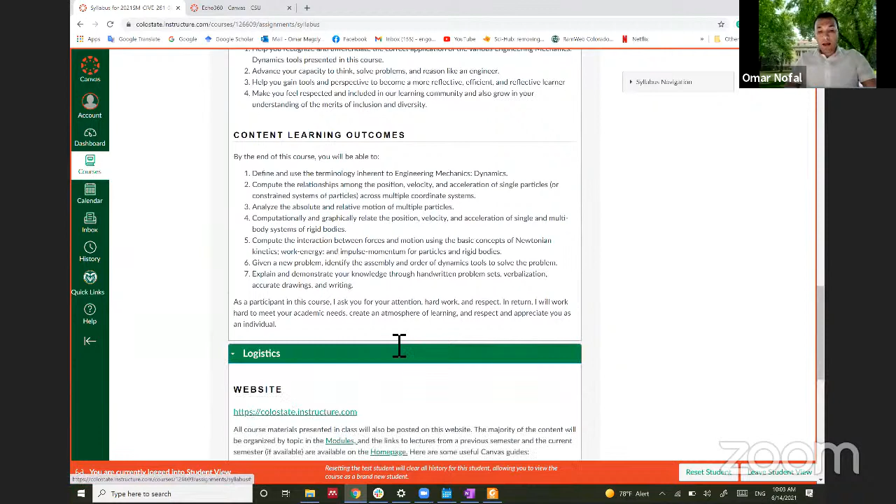Logistics, the textbook that we will be using, and my recommendation to use the Hibbeler textbook, 14th edition.

And here's how to upload your homework. Your homework will be uploaded onto Canvas. So you will go to your homework, you will find it if we go back, a panel that has homework, and then you go to homework 1 and upload your homework sheet.

It's better to use white paper, not lined or gridded. So you might use engineering paper, or white A4 or A5 paper, whatever you are comfortable with.

And it's better to scan your homework, so it's better to have it scanned. I do not recommend taking pictures with your phone unless they are clear and I can see them.

If I couldn't see them, I will return the homework to you, and you will only have one time to send it back if it's still not clear. So I might reject the whole homework submission. Just try to scan it, or have a clear version, so I can see the steps in your homework.

And here you'll find other information, try to check it to know the culture of the class, and for the assignments. So the total number of points of this class is divided into 10% on learning exercises.

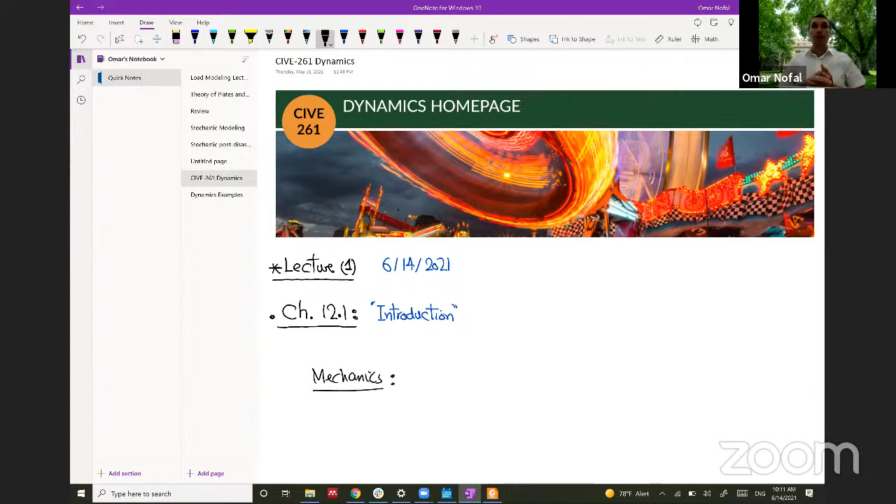Okay, sounds good, so let's get started here. Mechanics is a branch of physical science concerned with the states of rest and motion of bodies subjected to actions or forces. As you know from statics, the prerequisite class, mechanics is divided into statics and dynamics.

Statics is concerned with equilibrium of bodies. For example, if you have something suspended by two ropes with a weight, the body isn't supposed to move—it should be under equilibrium of forces F1, F2, F3. That's statics. In statics you talk about moment of inertia, mass inertia, and equilibrium of forces. You also sometimes solve trusses—say a truss on a support system that isn't supposed to move; it should be static. We solve for the forces on the truss so that all forces remain in equilibrium on this non-moving body.

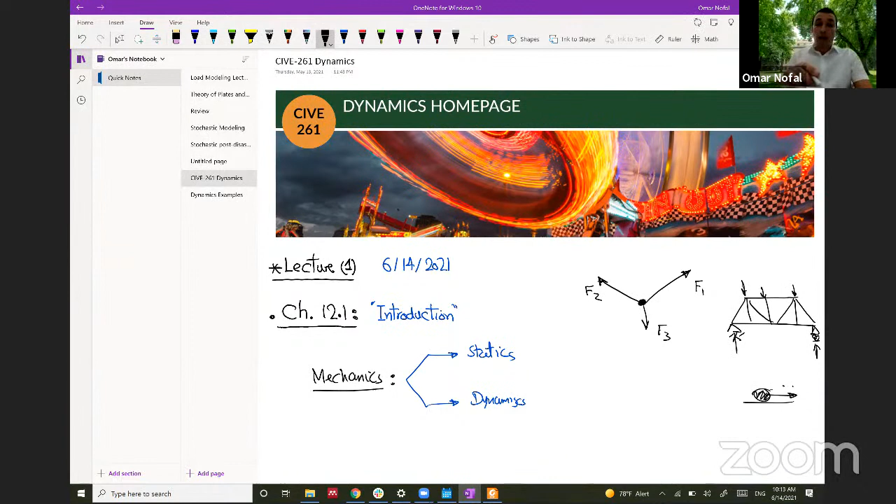But dynamics is concerned with the accelerated motion of bodies—like a car or a ball or something moving, having velocity and acceleration. So dynamics is concerned with moving bodies. That's statics and dynamics.

Let's get to dynamics, which is our class today. Dynamics is divided into two types of bodies: particles and rigid bodies. For each of these we study kinematics and kinetics. Kinematics is concerned with the position, velocity, and acceleration of the particle. Kinetics is concerned with the force or moment on the particle.

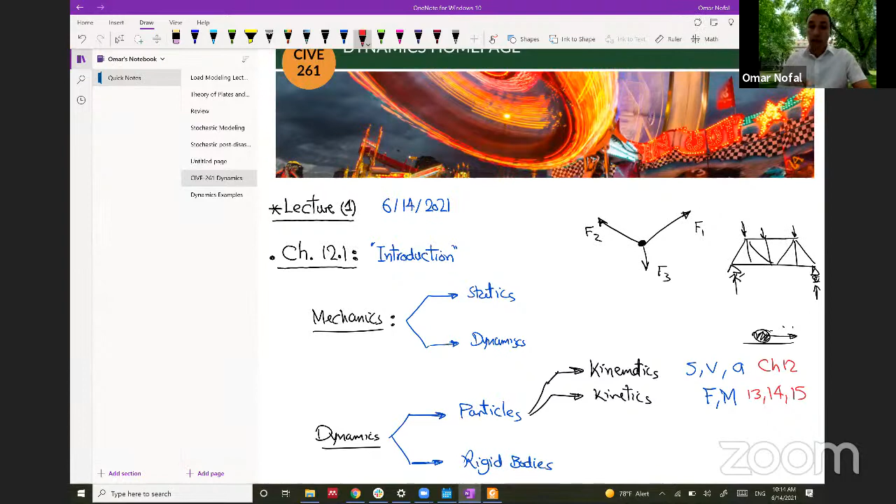The chapter covering kinematics of particles is chapter 12 in Hibbeler—this textbook covers kinematics of particles. Kinetics of particles is chapters 13, 14, up to 15. For rigid bodies it's the same thing—we'll be talking about kinematics and kinetics.

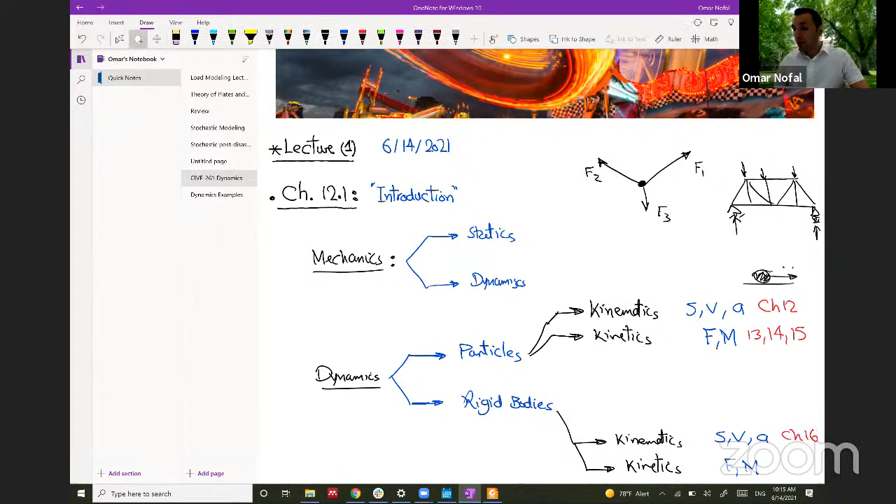For kinematics, we are also concerned with the position of the rigid body, the velocity of the rigid body, and the acceleration. Here we will be concerned about the forces and moments. The chapters covering this are chapter 16 for kinematics, and for forces and moments, chapters 17, 18, up to 19.

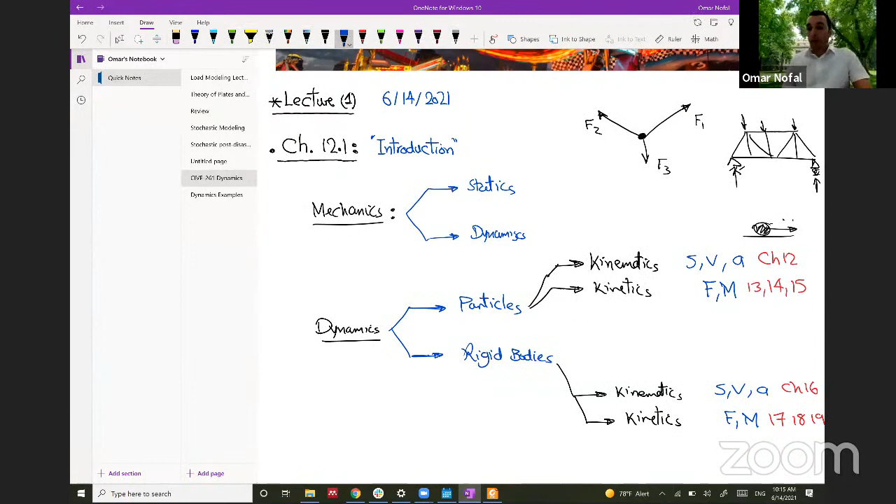The difference between particles and rigid bodies: for a particle, we neglect the shape of the body. Like if we have a car, we represent it with a point, a particle, and we put the forces like that - here's F1, F2, and F3. For rigid bodies, it's different - we have to take the shape into account, and the forces might be here, or there, creating a moment. This is the difference between rigid bodies and particles.

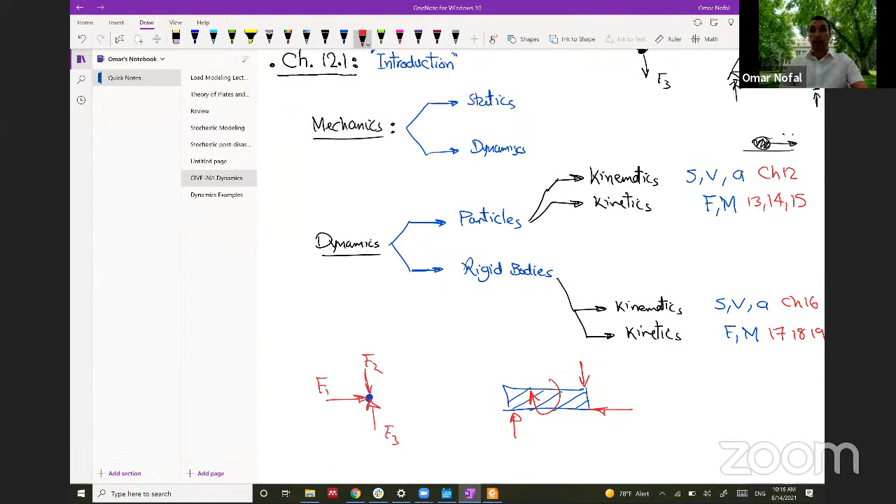Let's have some historical background. One of the first to do experiments using pendulums or falling bodies was Galileo Galilei, in the 1500s-1600s. Number two, the most important one, is Isaac Newton. Newton is the one who developed theories, and the culmination of his theories provided a relationship between motion and forces. He has, as you all know, three laws of motion: law number one, law number two, and law number three.

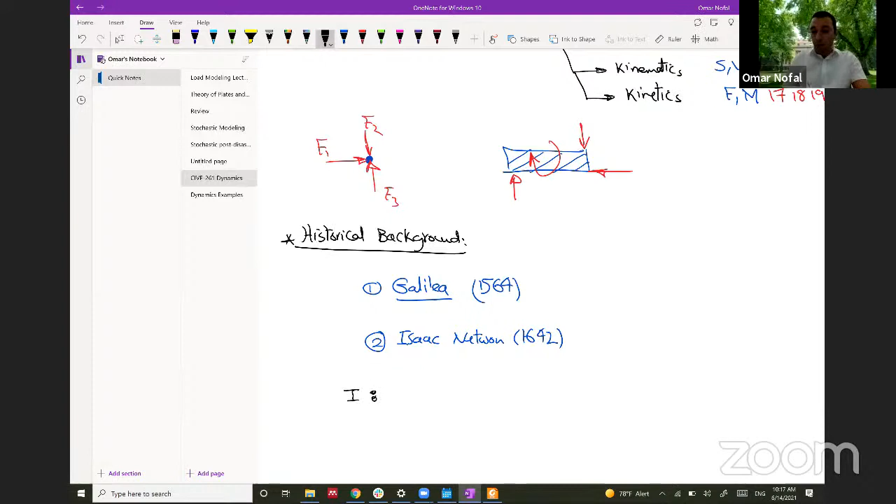Law number one says a particle remains at rest or continues in motion unless acted upon by an outside force. If I have this particle, it will remain at rest until you put some force on it. If you put force, it will make some motion. But if it's at rest, the summation of forces on this particle equals zero. Like if you have two forces like this, the summation of forces equals zero.

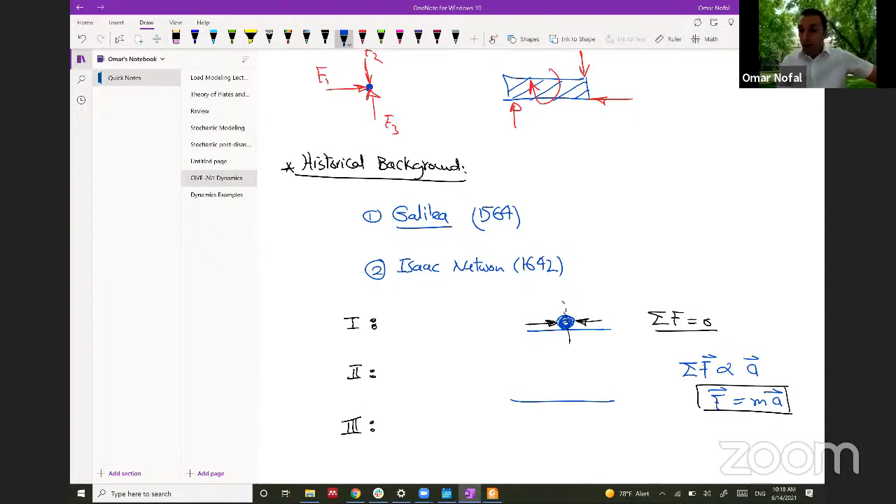For law number two, the acceleration of a particle is proportional to the resultant force. The summation of forces on the particle is proportional to the acceleration of this particle, and the proportionality factor is the mass - so sum of forces equals ma. If I have this particle in motion, it has some acceleration in this direction, so there are forces acting on it, and the sum of them is not zero - it equals ma. You have force here, friction, and whatever forces you have, the sum of all of these will equal the mass multiplied by the acceleration.

The third law of motion is the force of action and reaction between interactive bodies. Let's assume you have a wall with a hook, and a rope, and you put some force F on this rope, pulling it from the wall. The reaction here is R - if you take the sum of forces, F will equal R. This is valid for interactive bodies: the forces are equal in magnitude, opposite in direction - this is x direction, this is negative x direction - and they are collinear, on the same line.

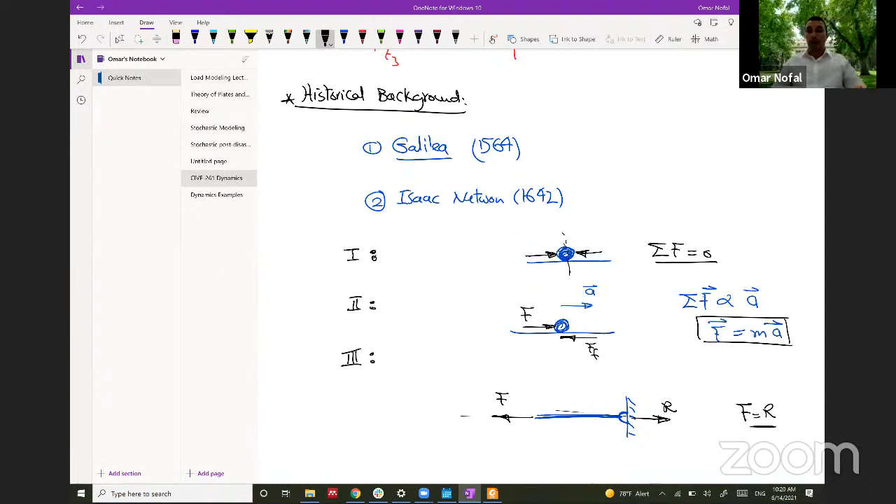So these are the three laws of motion that Newton came up with, and we will be applying most of these principles in our dynamics class. With this, let's move to chapter 12.2, which is talking about rectilinear motion.

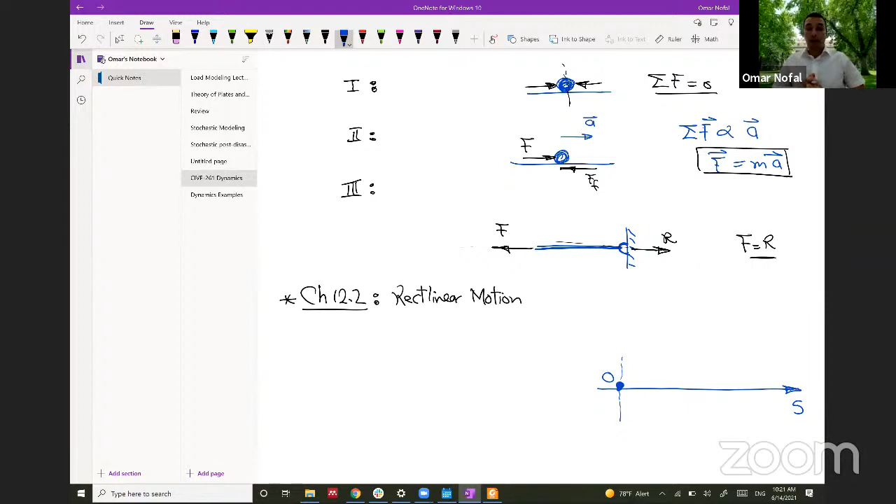For rectilinear motion, we mean bodies that are moving on a line. For example, if this is a road and this is the x-axis, we call it s, which is the position, and here's the origin, and my particle is at this location. If this particle is moving on this straight line and not on a curve or in 3D, we call this motion rectilinear motion, which is what we'll be talking about in chapter 12.2. Let's differentiate between some terms - number one, let's talk about position.

So for position, we mean the location of the particle at any instant with respect to a certain origin. So you define this as an origin, and the location, the position of this particle is at 0, so s equals 0. If the particle, and let's say this is time t equal 0, if the particle after 2 seconds is here, so this is what we call the position. The position is corresponding to a certain datum, which is 0 over here.

Let's second talk about displacement. Displacement is the change in the particle position. So if the particle started at t0 and ended at t equal 2 seconds, let's put units here. The final position minus the initial position will give you the displacement. So the displacement, we call it delta S, will be equal to S2 minus S1.

For example, if the particle at t equal, let's say this is T1 or T naught, and this is T1, and this is T2, and let's say this T2 is 3 seconds. So let's call this S1, and this will be S2. If you're talking about the initial position at T1 and the final position at T2, the delta S will be S2 minus S1. So it's the final minus the initial position.

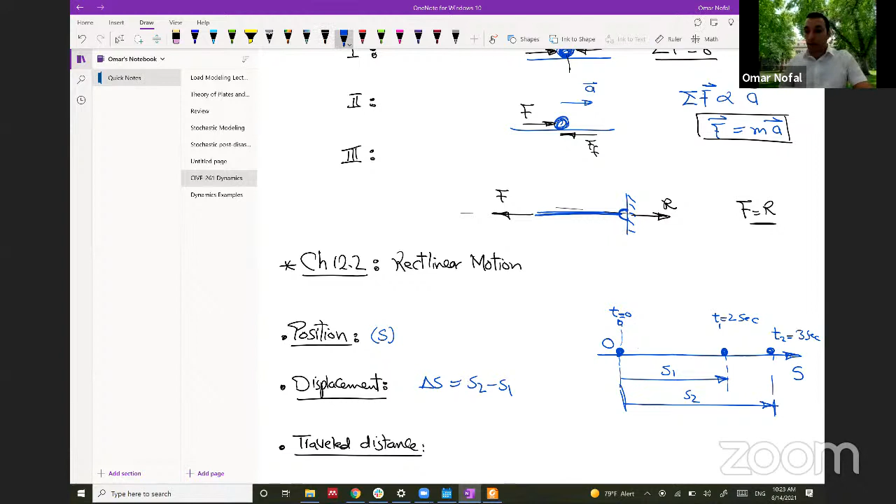Let's talk next about the traveled distance. For the travel distance, we are talking about the total distance traveled by the particle. For example, if this particle goes, let's make another one here. If the particle started at this location and goes in the negative side and moves back, so it goes here and then goes there, the final position of the particle is measured from here. This is the position of the particle. And displacement, if the particle moved from here to here, this is the total displacement, because this is the initial and this is the final position. But if we're talking about travel distance, you'll have to account for this distance, and this distance, and this distance. So this is the total travel distance, and we call it ST.

And let's talk about the scalar and the vector quantities. The position is a vector quantity, so we need to know the position and whether it's positive or negative with respect to the origin. If it's in this direction, this is S positive. If the particle is at this location here, it will be negative. Similarly, for displacement, we want to know the change in the particle position, and also whether this change is positive or negative. So it's still a vector quantity.

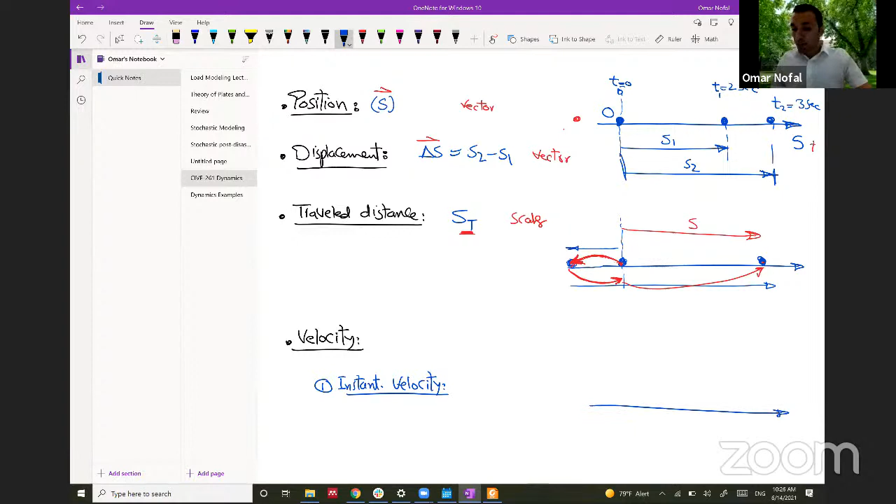For the velocity, we have different terms to define velocity. Let's start with the first term, which is instantaneous velocity. The instantaneous velocity is the rate of change of the particle position. So if I have the particle, let's write this again here, and the particle at T1 here, and here's T2, and this is S1, and this is S2. So the instant velocity is equal to, and it's a vector quantity, ds vector dt. This gives you the instantaneous velocity at each point over the motion.

So you can get it here, you can get it there. You'll have to differentiate the s vector, the position vector, and then you'll get the velocity as a function of time, and then you substitute with the time that you want. So here's at t equals 0, here's at t equal, let's make this 2 seconds, and this will be 3 seconds. If you want 2.5 seconds, you'll get it from here. So this is an instantaneous velocity, meaning the velocity at any instant, and it's a vector quantity.

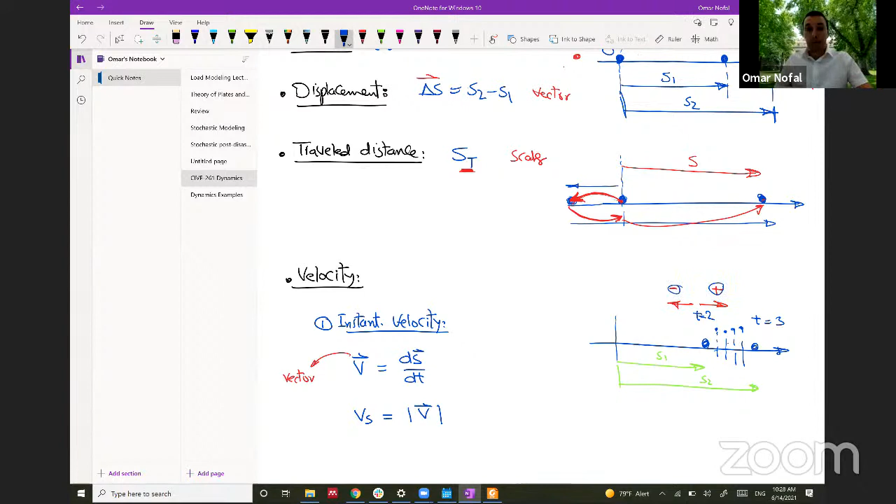So let's talk about the scalar quantity for the velocity, it's called Vs, it's the speed. It doesn't matter if the velocity is in this direction or that direction for the speed. The speed, I just want to know if your velocity is 50 miles per hour, 20 miles per hour, I don't care about the direction. But for the instantaneous velocity, we care about direction. We need to know if you're going in the positive or negative direction. So it's kind of similar, Vs is like the scalar quantity of the velocity after excluding the sign, positive or negative. So this is for the speed, and let's put it V, Vs is equal to the V vector here.

And number 3 is the average velocity.

So the velocity is changing, like for example here it starts at 2 meters per second, but when it gets here, it's 5 meters per second. So for the average, 5 plus 2 over 2 gives you 3.5 meters per second. This is the average velocity. In instantaneous, it gives you the velocity at each instant, so here it gives 2, here 2.5, 3, 3.5, and so on. This is for the average velocity.

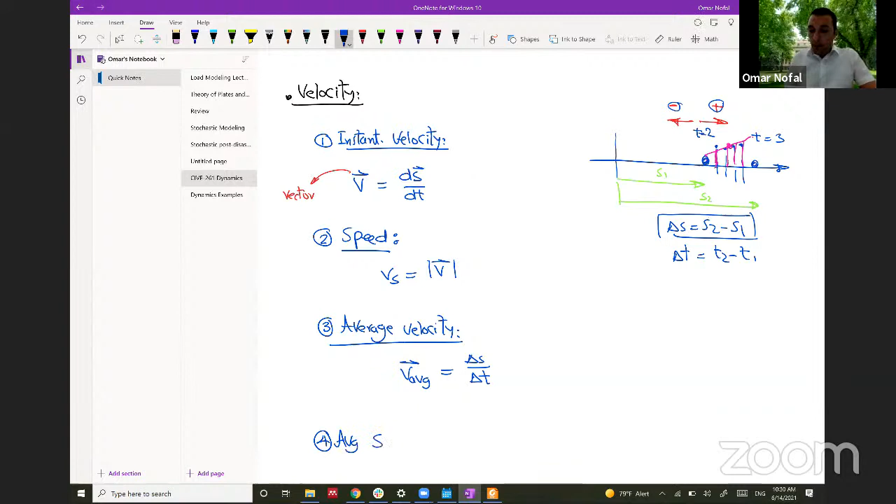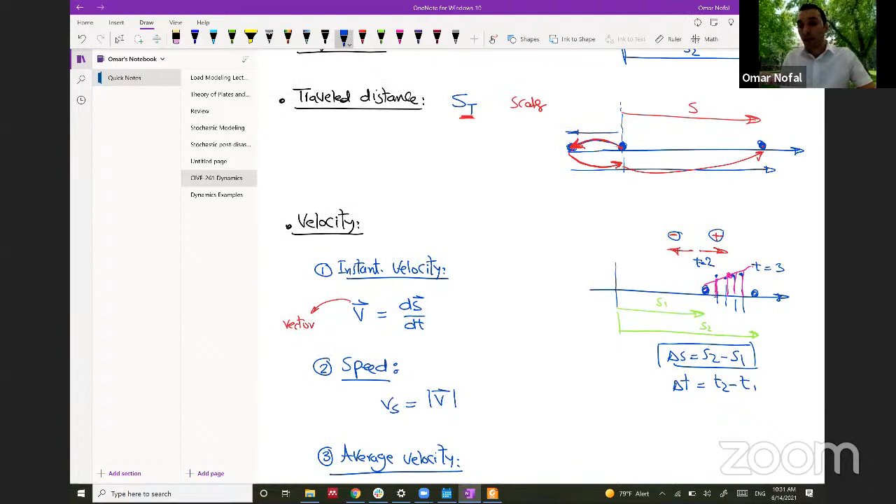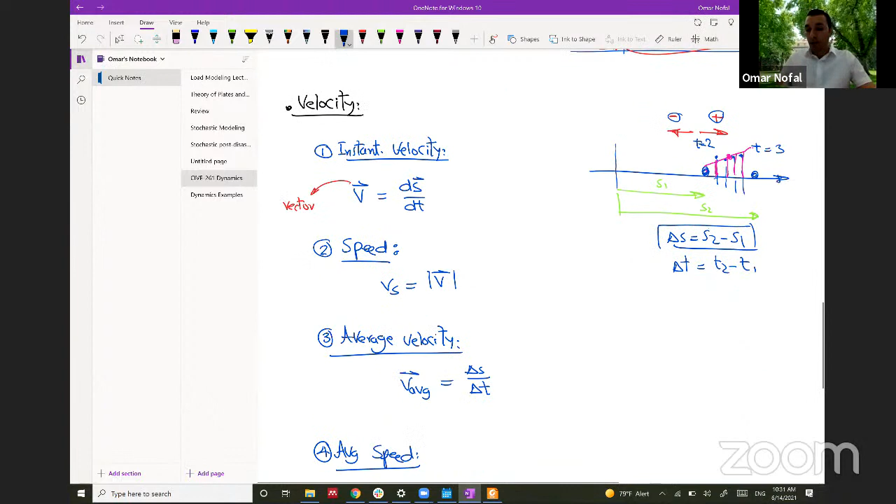Let's get to number 4, the average speed, which we call VS or VSP average. The average speed is the distance traveled over delta t. So for this example, you calculate the total travel distance, you cut this distance and then come here and then this. You calculate the time from here to get there, and also calculate all of these distances to get the average speed. So this is the difference between speed, velocity, average velocity, and instantaneous velocity.

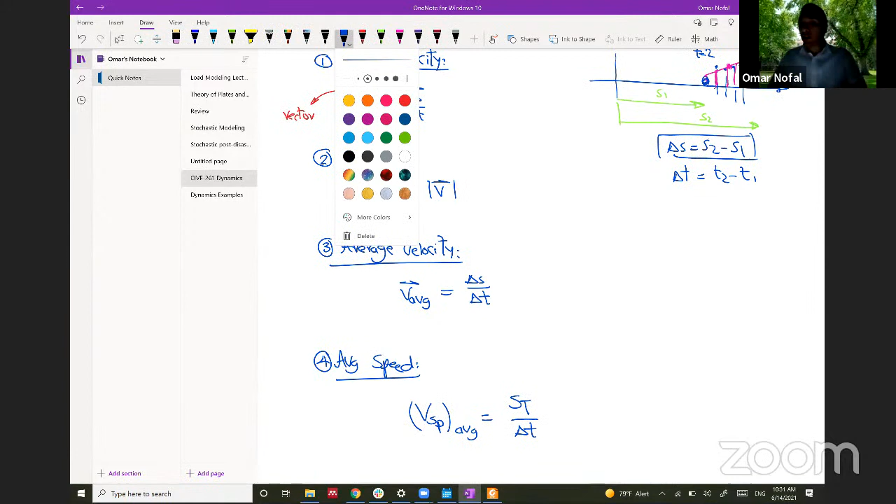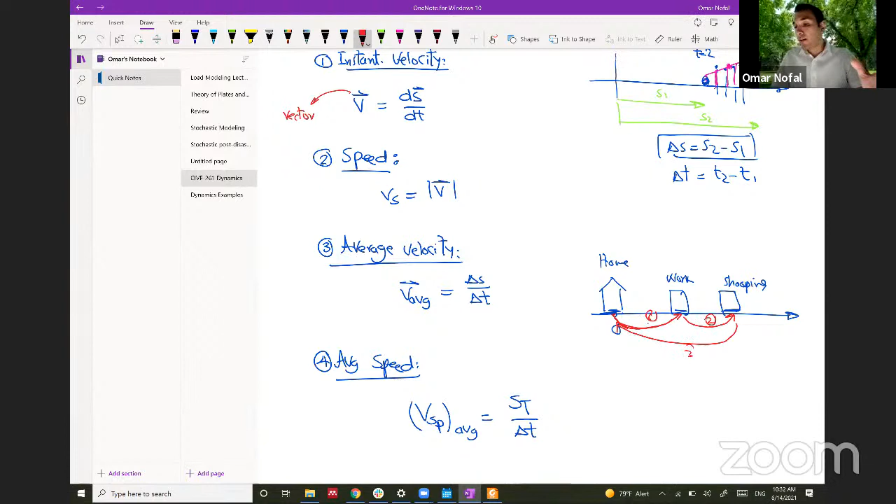To make this concept clear, let's assume the origin is your home here, and you get to work at this location. So here's your work, home, work, and this is where you do shopping. First you went from home to work, then from work to shopping, and then after shopping you get back to your home. If you are talking about your position, it will be 0, because you cut all of this distance, but you return back, so it's 0. But if we are talking about total distance traveled, you will have to calculate this first distance that you cut, then the second, then the third, accounting for all of these distances.

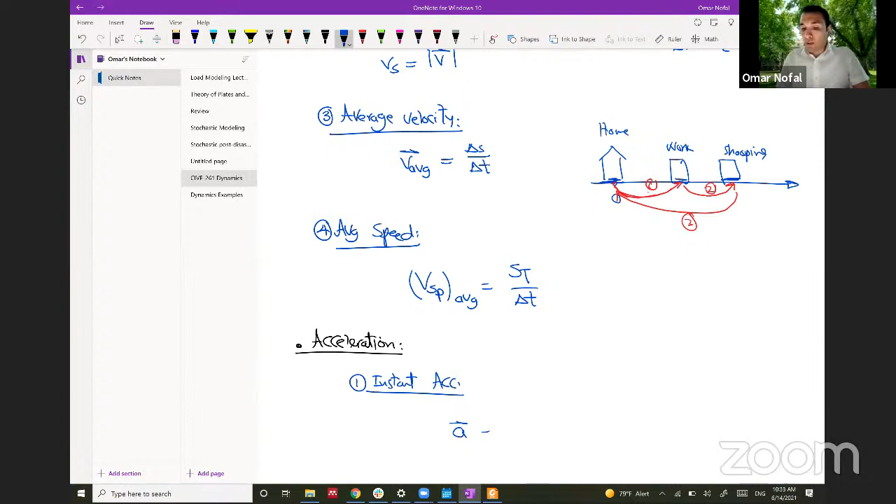Let's move to acceleration. For acceleration, we have 2 terms. One of them is the instantaneous acceleration, A, which is a vector quantity. It's equal to dv/dt, the rate of change of the velocity, so you have to identify the rate of change of the velocity.

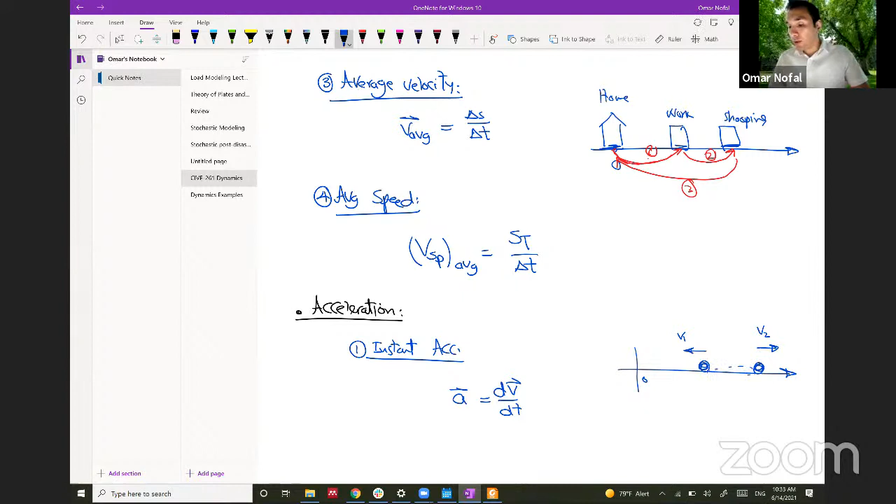Let's get to our example here, here's 0, and here's the particle. We will have to identify the rate of change of the velocity, how it changes, like for example it goes here v1, it goes here v2, and we need to know how the velocity is changing across this motion. This is the instantaneous acceleration.

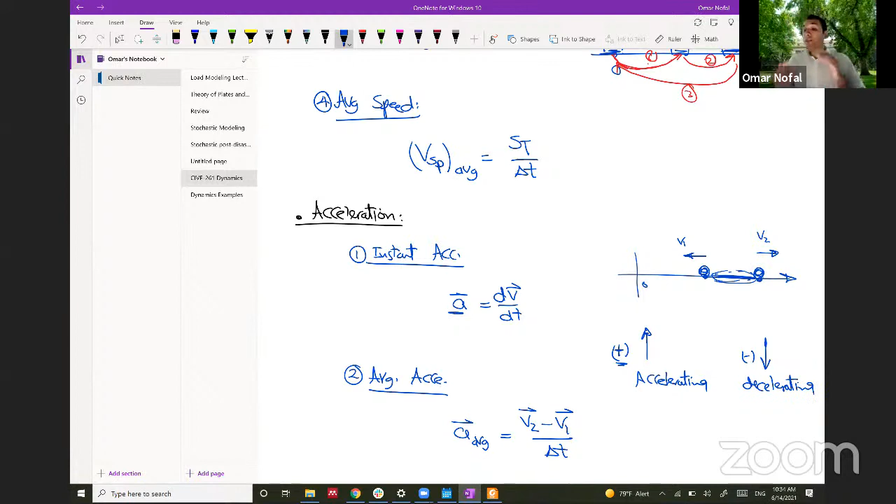Let's get to number 2, the average acceleration. The average acceleration is still a vector quantity, we call it A average, and it doesn't care how the velocity is changing in between. It only cares about the starting velocity and the ending velocity, the initial and final. So it equals v2 as a vector minus v1 as a vector, over delta t. If the acceleration is positive, that means the rate of change of velocity is positive, meaning the body is accelerating, the speed is increasing. If it's negative, the body is decelerating, meaning the speed is decreasing. All right, so this is for now.

Let's do a very quick example on this. Let's say this is the S axis and this is the origin, and I have a particle whose position is described over time by 10t squared minus 12t, where t is in seconds. So now if you calculate at t equals 0, s is in meters, and if I put 0 seconds here, it will give me that s equals 0. But if I put t equal to 2 seconds, it will give me 16 meters.

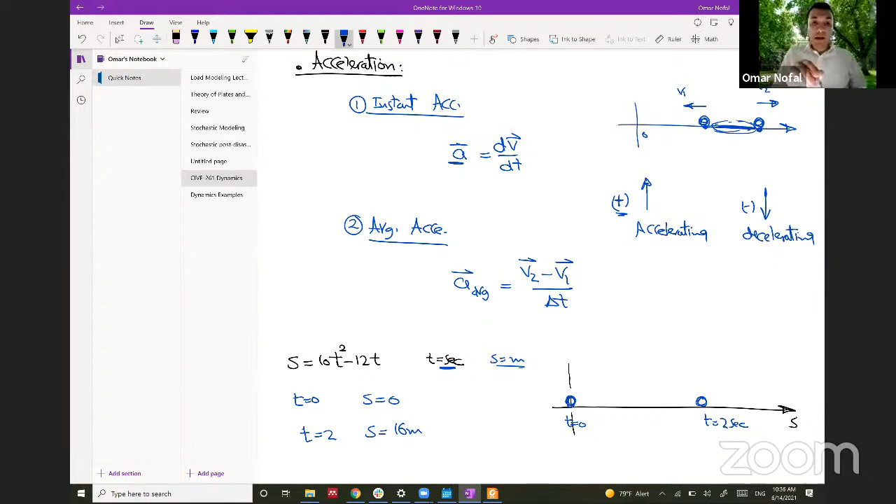So let's say that the particle is here at t equals 0 and here at t equals 2 seconds. So let's apply our principles. We just calculated the position at t equal 2 seconds, and this position gives us 16 meters.

Let's calculate the instantaneous velocity of this particle. v is ds by dt, which will be 20t minus 12. So this is the velocity. If you want to get the acceleration, a will be dv/dt. If you differentiate this equation with respect to t, it will give you 20. That means, since it's positive, the body is accelerating.

However, you will have to be careful. Why? Let's draw this here. Our particle at t equals 0 is here. But at t equal 1, if you substitute here by 1, it will give you that the particle moved in the negative direction. If you substitute by 1, it will give you -2. So you get -2, and then it moved back at 2 seconds, moved back +2, and another +16. So this is how the motion looks like.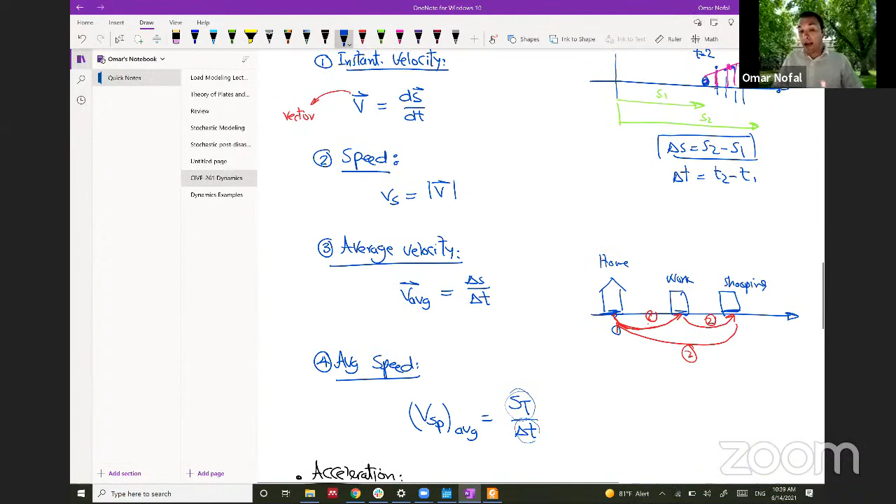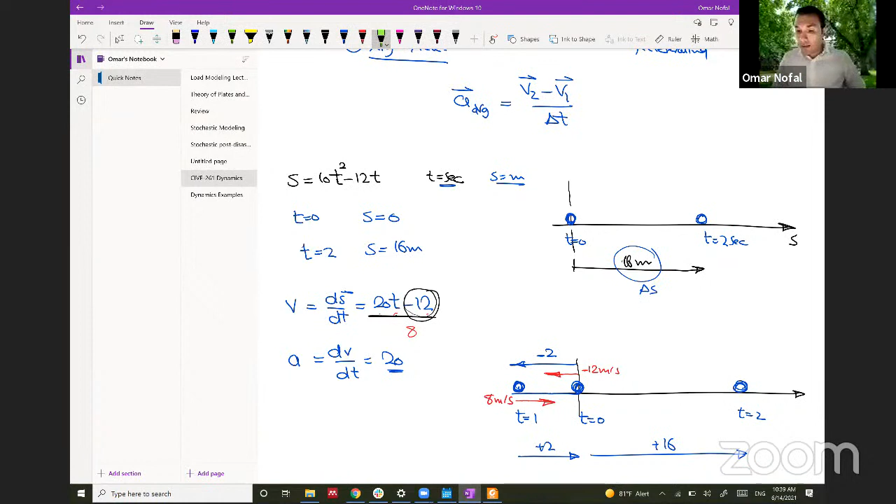So the average delta S from 0 up to 2 will be only 16 meters, because this is t at 0 and this is t at 2. So there's a difference between the delta S and the total distance traveled. So this is how it looks like.

All right, so this is for now, and we will be solving more examples starting from next lecture.